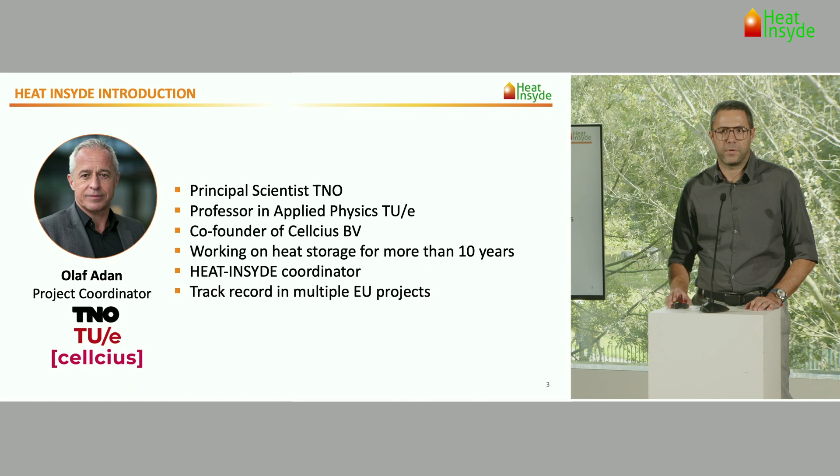My name is Francesco Pizzocolo. I'm the project manager of the HEAT-INSYDE project, and I'll be the moderator today. So just very quickly through our program: we'll start with an introduction about what the project is about, given by Olaf Adan, the project coordinator of HEAT-INSYDE. He works for TNO as a principal scientist and professor at the TUE, and recently co-founded, together with Pim Donkers, Cellcius, the company commercializing the heat battery.

Then the second set of presenters will go a bit into the technology. The two presenters are Professor Henk Huinink, our material expert and professor here at TUE, already a leader in several EU projects on the topic, and Pim Donkers, one of the founders of Cellcius, who will drive you into the hardware part of the battery.

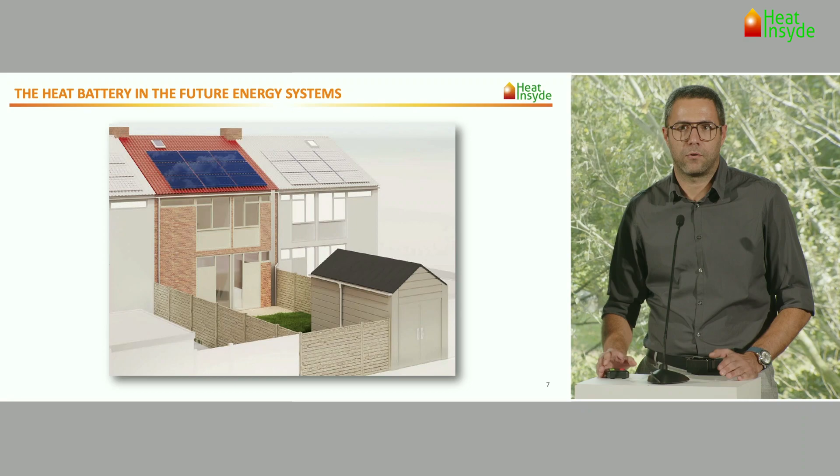The next presentation will be given by Bart Erich, about how the heat battery is going to be integrated into the future energy system. Bart is a senior scientist at TNO and also a lecturer at TUE, and recently started a company called Calosol, which he'll explain a bit more about later.

As with every big project, we need an external advisory board - basically a group of experts who check that what we do still makes sense, and not that we do it only because we love to do it. Two of these people are here talking to this audience today. One is Marc Linder, who is going to talk about other technologies for heat storage for balancing energy surplus and demand.

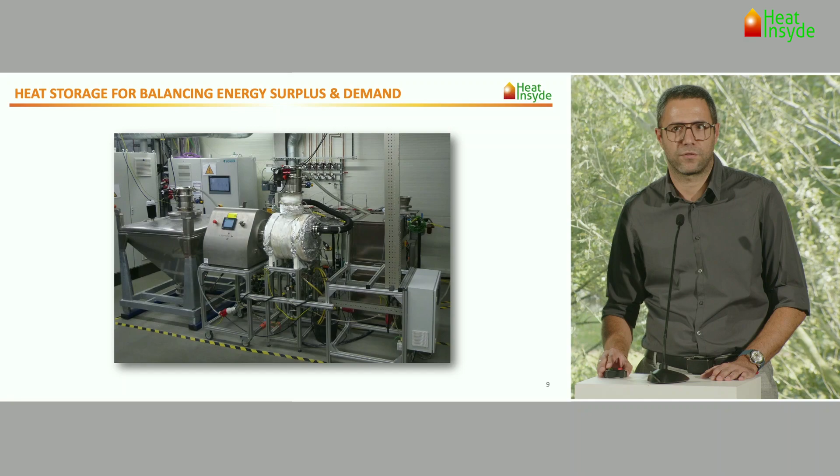Marc is a group leader at DLR, the German Aerospace Institute, and is a group leader in the thermochemical system. He has plenty of publications and patents on the topic, so he's a real expert and was really one of the guiding figures for us during the project.

And the last presenter is going to speak about the point of view of policy and the regulator - I'm going to talk about heat storage in the current political environment. That talk will be given by Nic Castellucci, who leads battery storage project development at TMEIC Europe, and has been working on energy storage topics for more than 10 years.

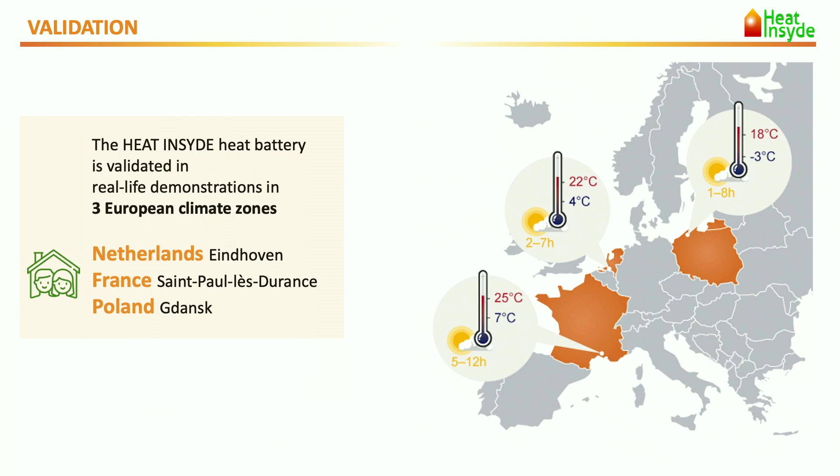As I said, HEAT-INSYDE is a so-called innovation action, meaning that it's not only about technology, but about bridging the gap between technology and the market, bringing technology into application. In order to do so, HEAT-INSYDE has 3 user-centric demonstrations where we validate the technology, spread over Europe in 3 different climatic zones: the Netherlands, France, and Poland. The first demonstration is really about to start now.

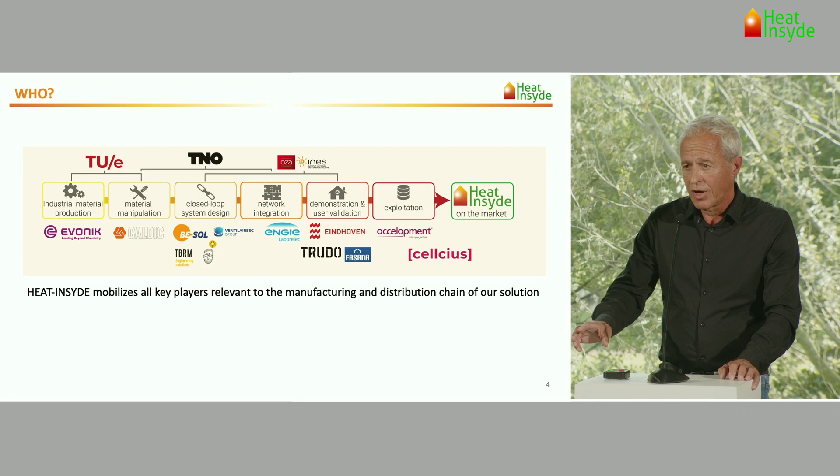So, who are we? I'm not going to introduce all the partners separately, but HEAT-INSYDE is mobilizing basically all the key players in the manufacturing chain as well as in the distribution chain. Talking about manufacturing, that's first of all about the material, but also about the hardware of the device, as well as about its implementation in the energy system. The consortium is supported by 3 technological players: TNO, Eindhoven University of Technology, and CEA from France.

This demonstrator was based on 2 main breakthroughs. First of all, if you would like to develop a rechargeable battery, you need a material that is also capable of being cyclic stable—you should be able to load and unload the material many times. That was the first breakthrough. The second breakthrough is a system concept that is able to use the full potential of that material.

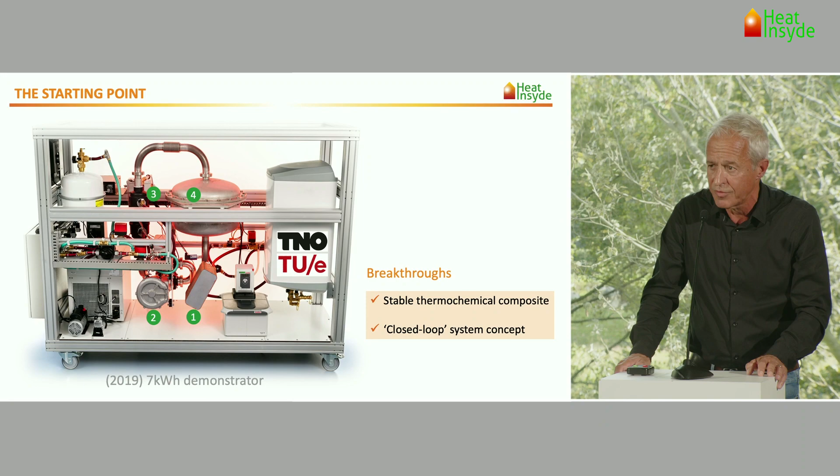Basically a system that is using also mature technology. If you talk about those components, 3 of the 4 are really mature components, thereby being cheap and also allowing us to make the steps towards the market very, very fast.

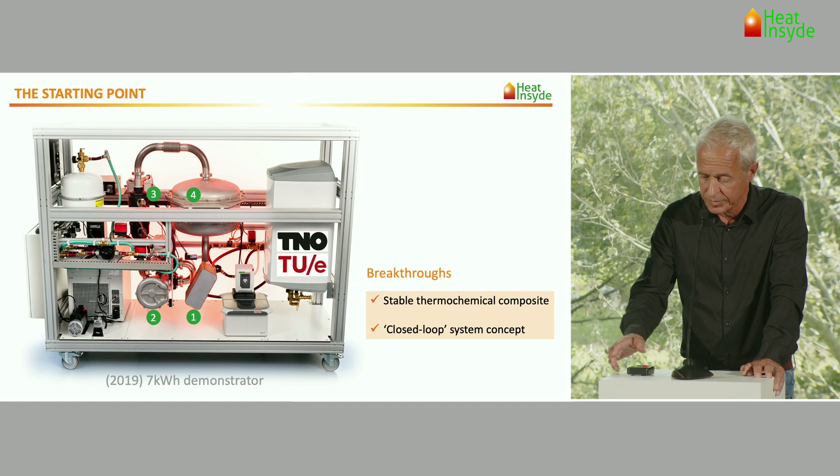Well, this first demonstrator also proved the unique selling points of the concept, starting with the fact that this is a storage device which is really loss-free. So once the energy is stored, it remains there without any loss.

Secondly, it's a very compact solution, meaning that if you talk about the energy density of the system, it's far more compact than water, which is the common way of storing heat in practice, and even more compact than the best lithium-ion battery that's on the market.

Thirdly, it's affordable. You can specify that in many ways, but it's far more cheaper than electric battery solutions—far more cheaper. Fourth, it's sustainable.

We are using material that is inherently safe. It's non-toxic, non-corrosive, non-flammable, and it's very easy to recycle. Apart from that, the eco footprint of the base material is excellent, and the system has been designed for fully reuse.

Fifth, it is a very versatile solution. So it is delivering heat—that's why we call it a heat battery—but it can be charged by either electricity or heat or both. And then there's one more thing, the sixth unique selling point: the cooling option. We're talking about heat, but basically cooling is also becoming very important, and the cooling option is inherently included in the concept.

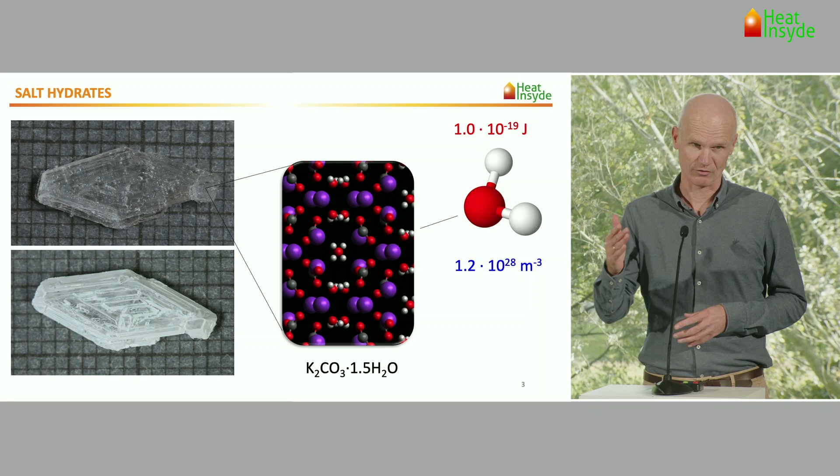How does it work, then, more practically? So you have salt—in this particular case we use potassium carbonate. You bring it in contact with water vapor, heat comes out because the water binds to the salt, and you can reverse that. Due to the fact that you can reverse that, it gives you an opportunity to store heat and also get it out again.

Going a bit more into what that could mean in terms of devices—Pim is going to say more about the device itself—but here you see the basic cycles. On the left you see the discharge cycle. So you have the dry salt, there is no water absorbed in that, that's the green part.

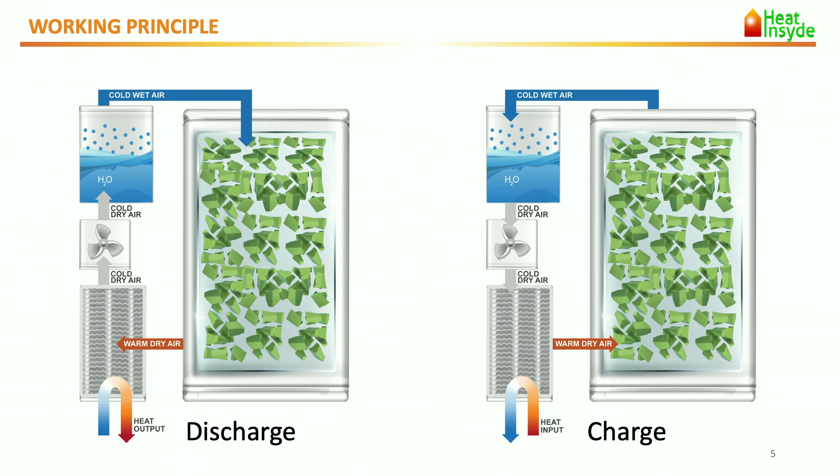Then, in the left down corner, you see a point where air is flowing up to a water vessel. There water evaporates. You bring that to the salt. The water becomes in contact with the salt, and then heat is delivered and given away in the upper down left corner towards the heat exchanger, and you extract it for use. And that's something you can, of course, reverse.

So now zoom in to the right graph. Again, going down to the heat exchanger, you bring in heat. With that you get warm air—you evaporate... sorry, let me correct that. You have warm air, you bring it down to the salt. There you drive out the water, and the water you condense in the condenser again. This is basically the charging cycle, because you charge it by drying.

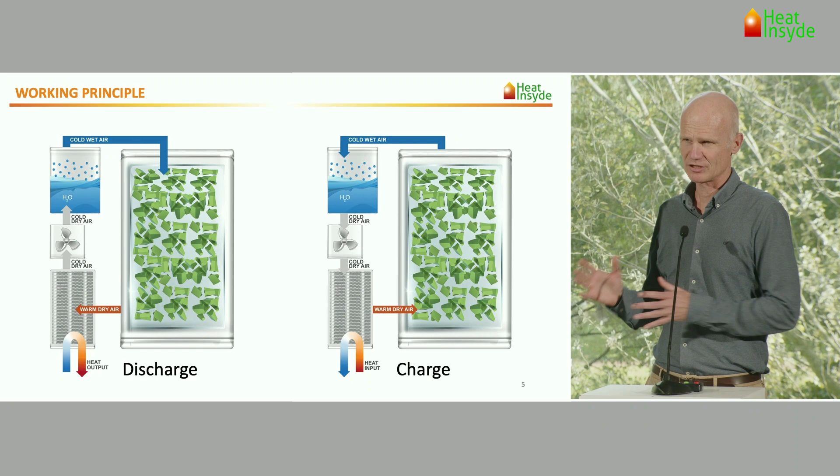A few words to make it a bit understandable what this means in terms of technology development. Water goes into a salt and is built in there on a molecular scale. That means, of course, bringing in space—you need space for the water molecule.

Now, if you start to think about developing materials, it's not only about having a powder and being able to throw that into a device. If you bring in a powder, I can already assure you, that doesn't work. So you really have to manufacture dedicated particles.

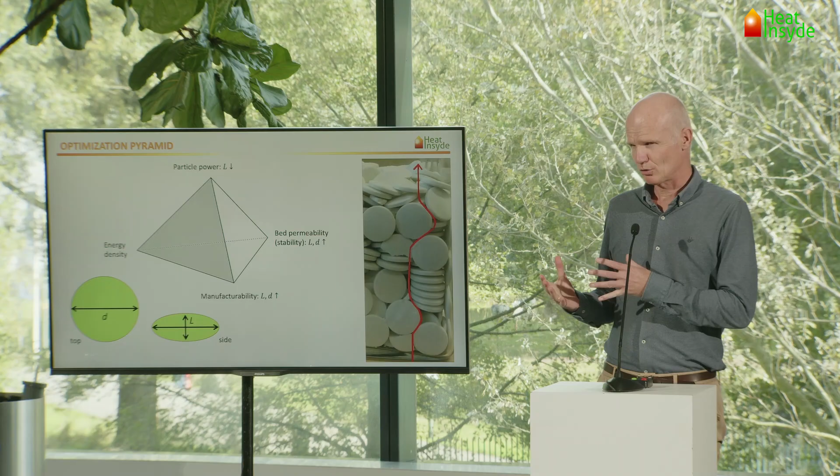There's a kind of optimization pyramid in that—you have different properties. Logical, technological properties: kinetics, there should be sufficient power output, so the material should respond fast. It should be stable, of course, but also manufacturable. Sometimes these different requirements are a bit contradictory with respect to the size of the particles. For speed and power you want small particles, but for manufacturing you want big particles, which are easier to manufacture. This is a bit the pyramid we've worked on for the last years.

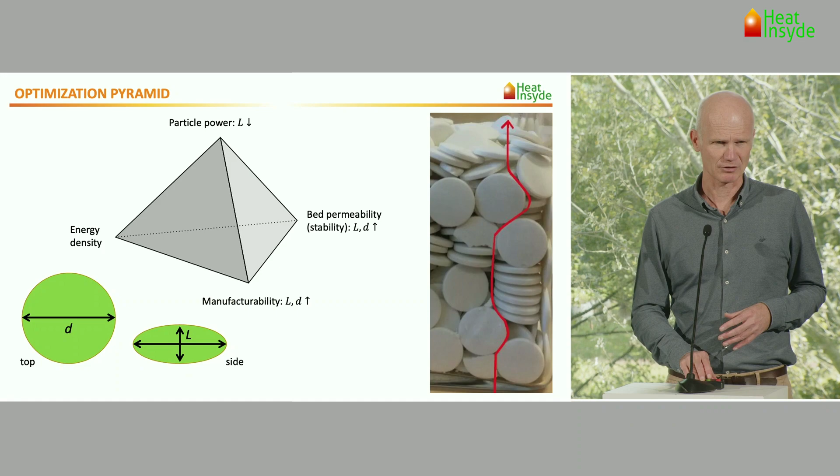A bit of a glimpse—this is how the most recent version of the particle looks like. You see key numbers with respect to the output characteristics: energy density, power output, and also estimated cost. Here I don't refer to the cost as how we made it, but based on predictions, for example from partners and colleagues who have experience with that, about what it could mean if you scale it up.

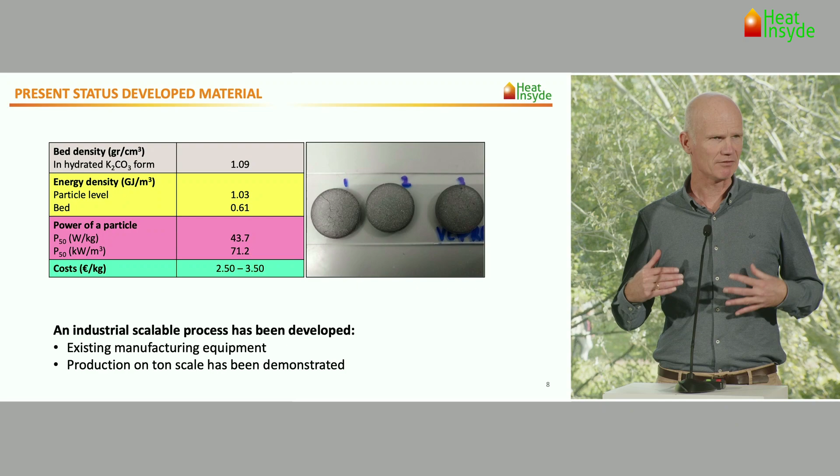With that, I want to hand over to Pim.

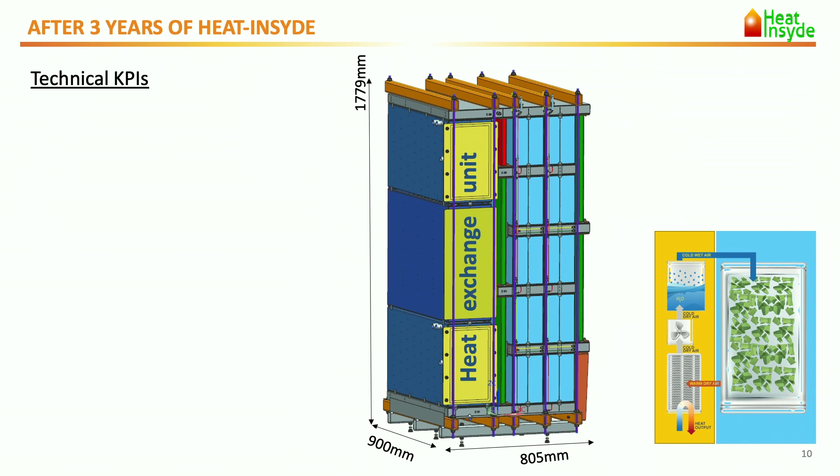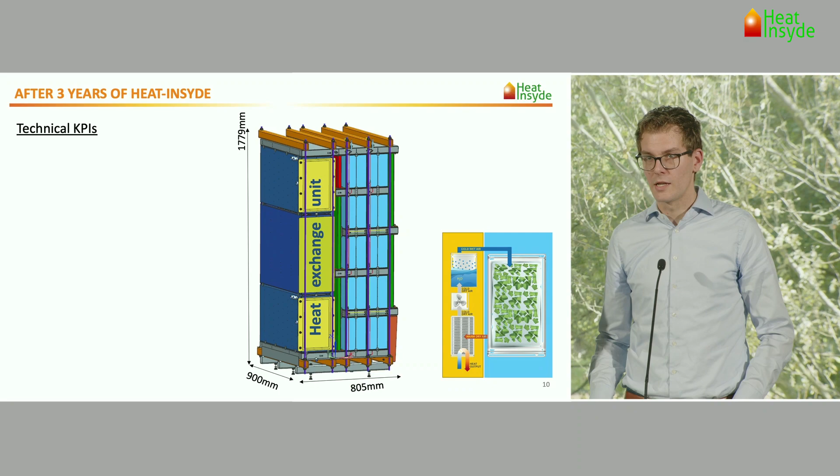Here you see the blue part with all the TCM vessels—that's where the active material is located. On the left side you see the yellow bars, the yellow part, and that's all the smart parts of the battery: heat exchangers, ventilator, evaporator, condenser—all integrated in the left part. And these two have to interact in the right way with each other.

Now, first of all, if you look at the KPIs of the device which we created, they were talking about capacity. Capacity is how much heat can you store in a battery with only one hydration-dehydration cycle. So it's not saying anything about how much heat you're getting out of the battery in total over a year or over 10 years—only one hydration-dehydration cycle.

We're talking about 200 megajoule. What you see here is 10 boxes, and we can change the capacity quite easily. We have 2 rows of 5 boxes, and we can enlarge that or make it smaller.

The other thing is charging power. We're charging here, and we can do that with solar collectors, with PV, or with just grid electricity. So any energy we can put in ends up, for our system, in the power of the order of 500 to 4,000 watt.

Discharging power is a little bit lower, meaning we can discharge a battery between 500 and 2,000 watt. It's important to know that at this moment we are not foreseeing the battery as a standalone version, but always in cooperation with a heat pump and a buffer vessel. This means that the high powers you need for taking a shower will not come directly from the battery, but we use that in combination with short-term storage.

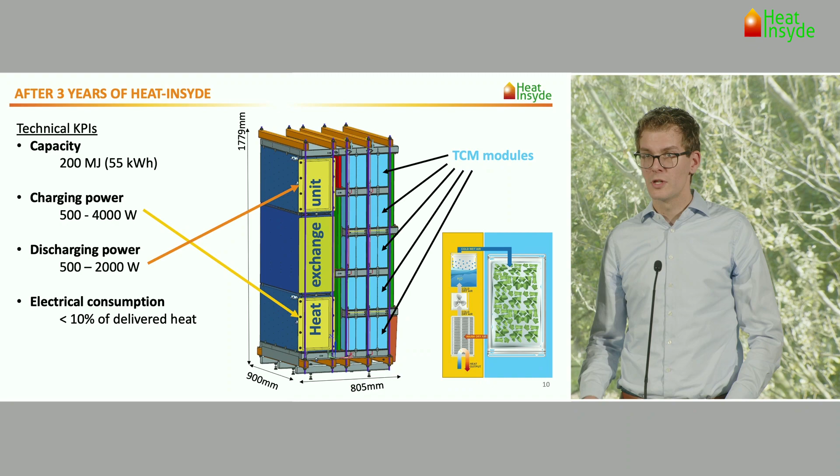Last but not least, as I said, we are integrated in an entire system. Bart will explain more about that. Because of that, we are going to increase or decrease the electricity consumption of the entire house. But in this battery, of course, we also need some electricity, not to charge it, but really to keep it running.

You have ventilators in our system which bring the humid airstream to the TCM. To keep that at a decent level, we designed our battery so that our electricity consumption is always less than 10% of the heat output. So talking in terms of COP, we have a COP of 10 or higher.

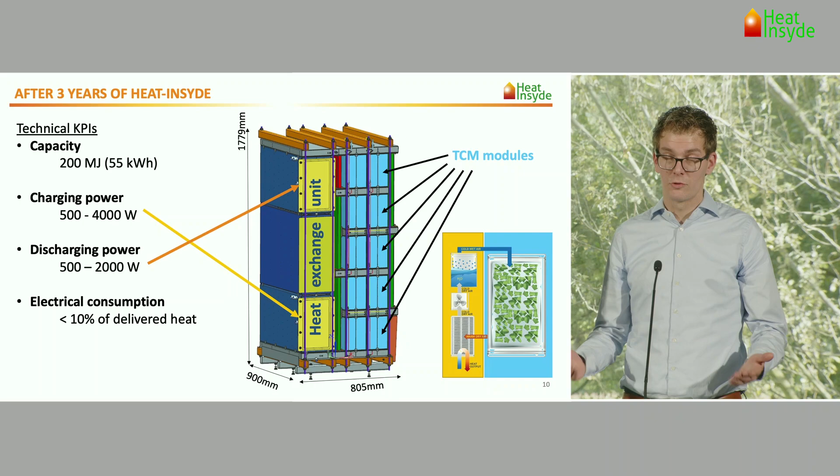Now, how does a battery look like? I showed you the picture, and you will see in a few hours how the battery really looks like, but this is how we build it up. It contains small parts which you can build in at every house, every location, as long as you have floor space left in the order of 1 by 1 meter. We can bring it in with small packages and build it up. Building up such a battery takes about 1 hour.

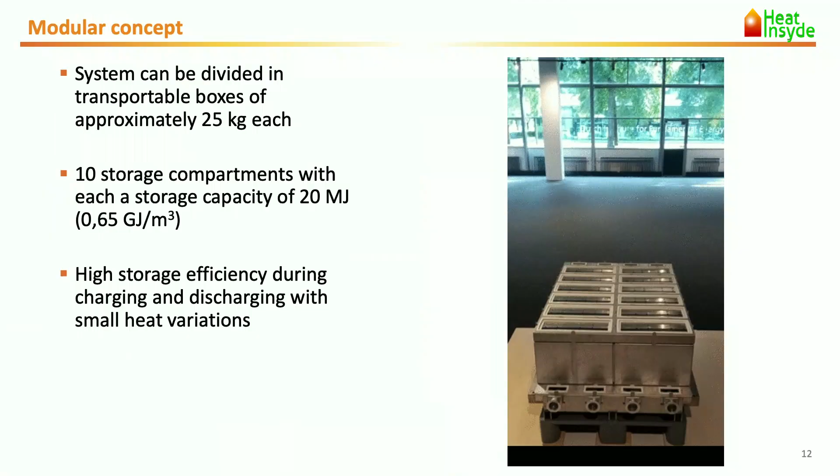Then there are 3 KPIs I'd like to show in more detail. One is the modular concept, which I already explained. We have a certain amount of boxes, 60 boxes in total in the first version, which we could build up, and now we have already a smaller one. So the modularity of the system is really high.

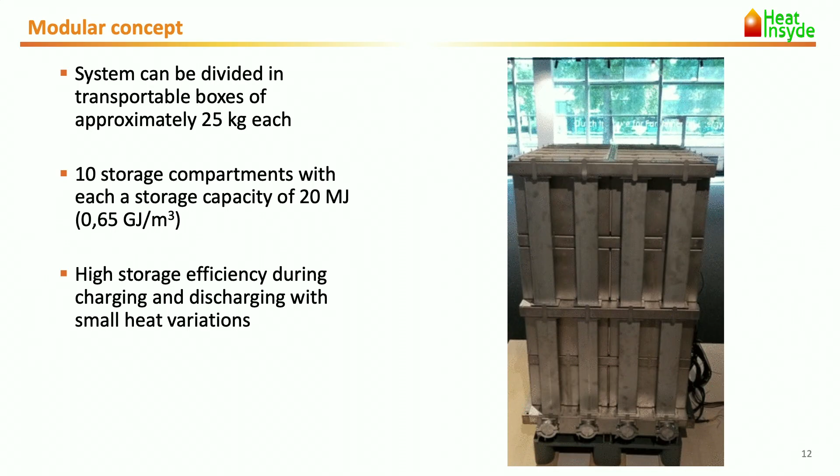Each box contains 25 kilograms of active material, which means you can lift it by one person. Why do we have such a small box?

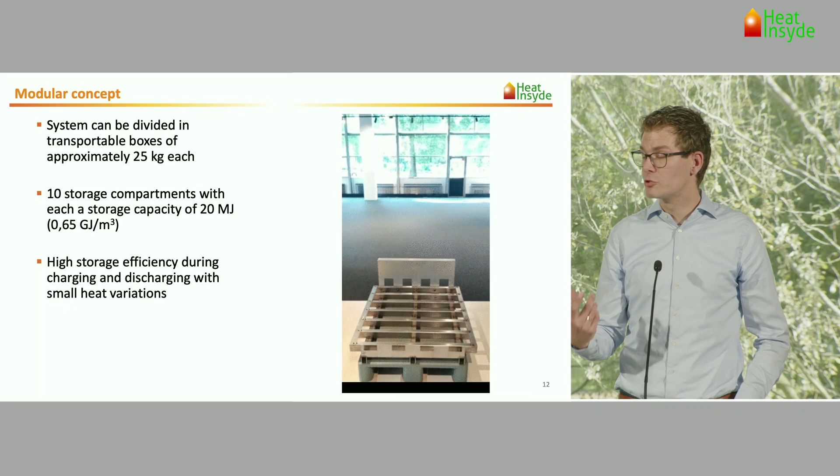It's because we'd like to be able to charge and discharge the battery with small amounts of heat. If you have a large vessel, just one large vessel of 1 cubic meter, you have to heat up the entire vessel before you're able to do the chemical charging of the battery. Heating it up isn't an issue, but then you'd not only cover the heat capacity of the battery; you'd also need to cover the chemical reaction, really removing the water from the salt. For that, using smaller boxes makes it easier to have a quick charging and discharging cycle.

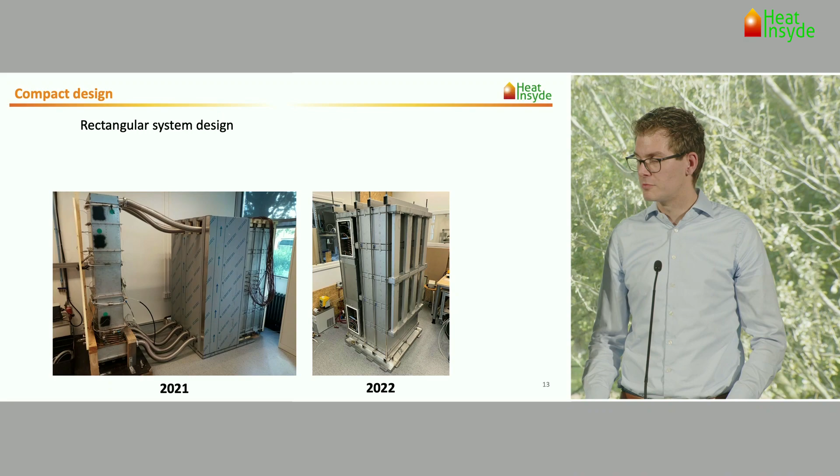The other thing is our design. We changed our design compared with previous projects from a circular design to a rectangular design. Olaf already showed the old version, a really large battery. In 2021 we also had a large battery, but the dimensions were already different, and we saw the component box and the battery next to each other, but they were not integrated. Now the 2022 version is a really integrated battery, combining active material and component box. That's the step we made forward.

Due to the design changes, going from a circular one to a rectangular one, we are increasing our storage capacity on a certain surface area. The other thing is that we are making a fully integrated battery, which also decreases the amount of floor surface occupation.

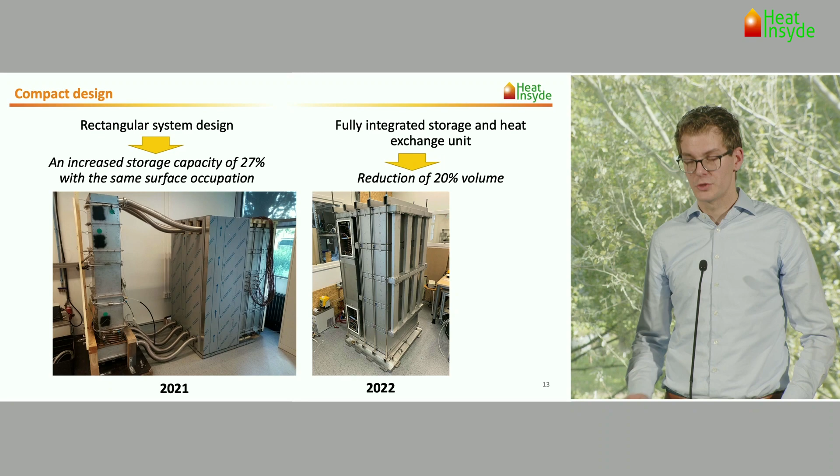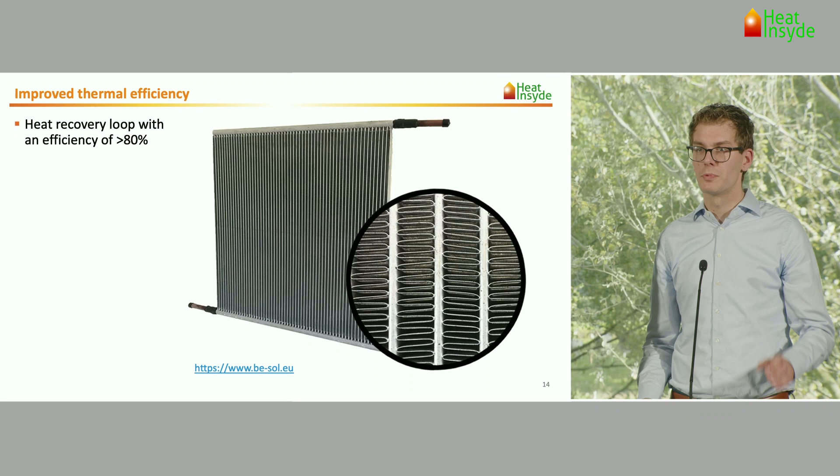And then, last but not least, is the heat exchangers which we're using. One of the key things is that we are going to get heat out of our battery, but we also need to evaporate water. We're doing this evaporation process at a really low temperature. If we would like to get 60 degrees out of the battery, we are evaporating in the order of 10 to 20 degrees Celsius, meaning that we have to decouple the process of what is happening in the TCM and what's happening in the component box. And that's what we're doing with help of a heat recovery unit.

And the impact of this heat exchanger is really high. Currently we have a performance in the order of 80%, meaning that, where we came with an efficiency of 60%, we improved the heat recovery efficiency by almost 20%, and that directly impacts the size of your battery. So having a better heat recovery unit will increase the performance and decrease the volume occupation of your battery. And that's one of the major achievements which we did within HEAT-INSYDE.

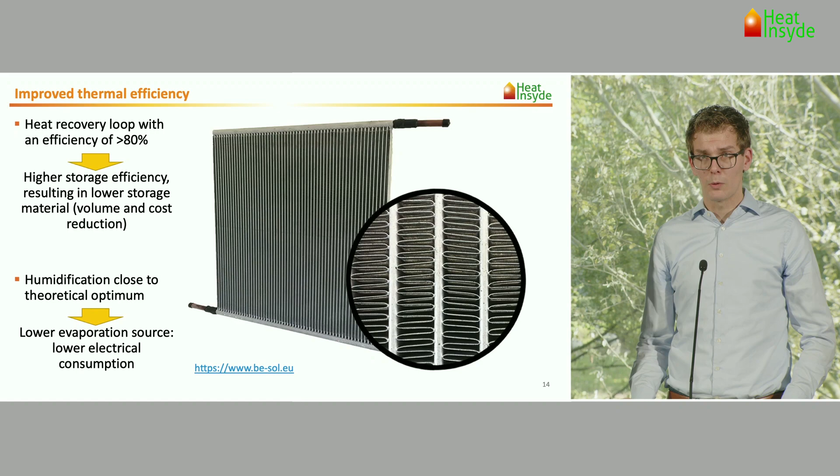And with that, I would like to finish. And what you see here is the transition to Bart, his work. Thank you.

Thank you, Pim and Henk. I have to say that I know the story for more than 3 years now, but it's still very cool to see where we started and where we are now. And as Pim mentioned, this is a perfect transition towards Bart.

So Bart is involved in several technologies, and is going to give you a hint about how all these technologies are integrated. Thank you very much. And because everybody's so fast, I have more time or not?

So what I would like to talk about is how we are going to integrate the heat battery into a house. We have 4 different demonstration sites. With the help of our partners, we are going to demonstrate in 3 climate zones. And what I would like to talk to you about is why do we need the battery for heating a house and cooling a house? How can a thermal battery help, and what do we expect of the demonstrations we are going to do in Poland, France, and in Eindhoven?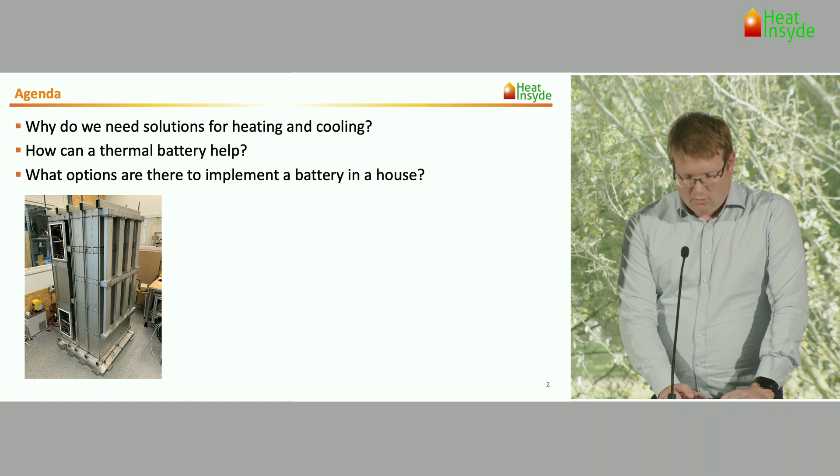And what's important is also to see what are the different options to implement such a battery in a house. Well, if you look at the current houses, then we know that 60% or even more of the energy demand is not for electricity, but for heating and cooling. And what we also see is that the roofs are going to continuously expand the amount of PV we put on the roof, and it's almost completely full with solar PV.

And if we want to renovate houses, then we see also that nowadays we have a problem with the grid connections. So many of the social housing corporations have to ask for enlargement of the grid connection if you move away from gas, and they're simply not easy to enlarge. Waiting times can go up to several years. So what we need to do is find solutions where we do not have to enhance these grid connections.

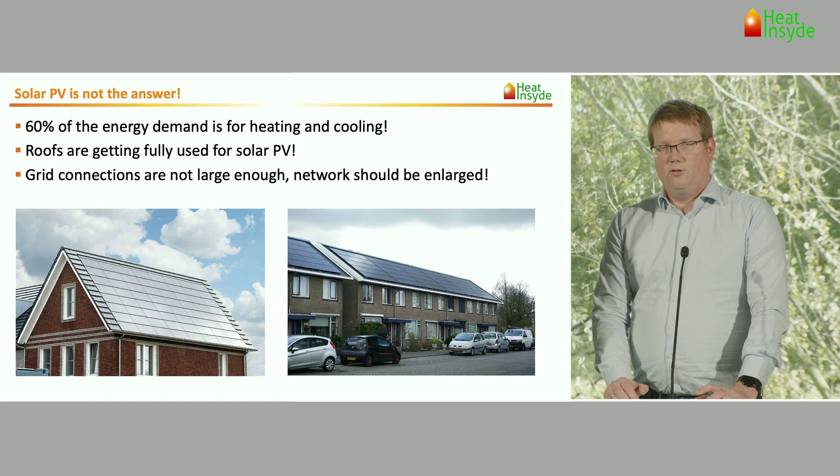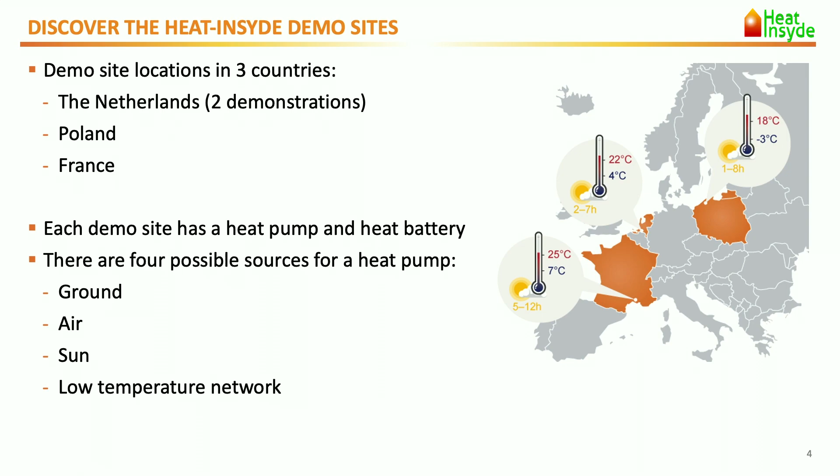So what we are going to do is actually demonstrate how this heat battery will work in these demonstration sites. With the help of our partners in France, it's CCA and Ventilair-Sec. In Poland, it's Prefasada who helps us. And then in Eindhoven, with the help of Trudo, we have found one of the houses where we are actually going to install the heat battery in a shed. I will explain later why we do that in a shed.

And also we are going to install, with a house owner here in Eindhoven, with the help of the municipality of Eindhoven, we found one tenant where we are going to install the heat battery in their house, having a low temperature heating network connection to that house.

Each demo site will have a heat pump and the heat battery. And in principle, if you are installing a heat pump, there are 4 typical sources which you can use as a source for this heat pump. First of all, you can use a ground loop as a source, but also air. Of course, one option is also to use sun, regularly known for PVT, so where you have PV panels on the roof with thermal connections on the back. But we also have a new option, which I will show you. And you can also connect to a low temperature network. Actually, 3 out of these 4 we are going to test in this demonstration site.

So I made a short summary. In the Netherlands, here in Eindhoven, we will connect to a low temperature grid. The house of Trudo will be connected to solar panels where we harvest energy from sun and air. In Gdynia, Poland, we will connect it to a heat pump connected with an air unit outside. And in Cadenet, France, we also connect the system to an air source.

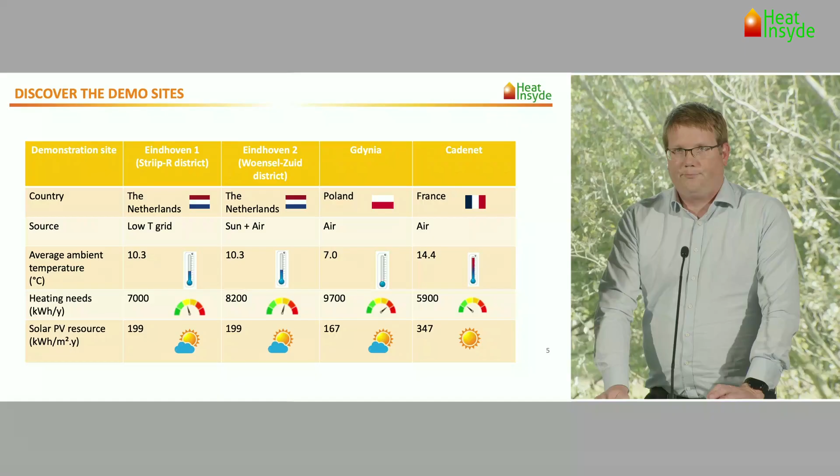If we are going to install this in a house, we know that a lot of houses here in Eindhoven, row dwellings, do not have that much space. And if we install a heat battery, a heat pump and buffer vessels, the already small living space gets smaller. That's what we don't want for the tenants.

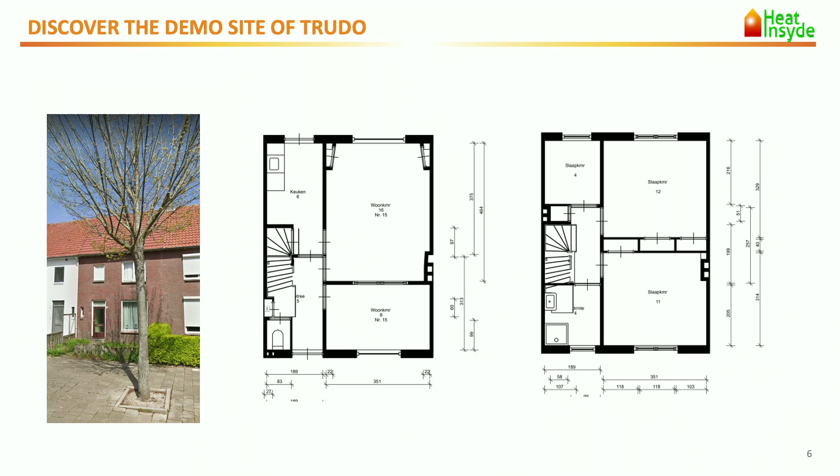The second thing is that we have to move into the house of the tenant and make space and clear up room to actually install this system. So that's why we said, why not go to another solution which was developed in a recent EU project and was demonstrated also here in Eindhoven.

We installed a smart heat shed in a house of Trudo. The advantage of such a heat shed is that we can place it in the garden, connect it to the house, and you have a completely gas-free heating solution. What's also an advantage with this system is that you can prefabricate everything. Still, you need a source.

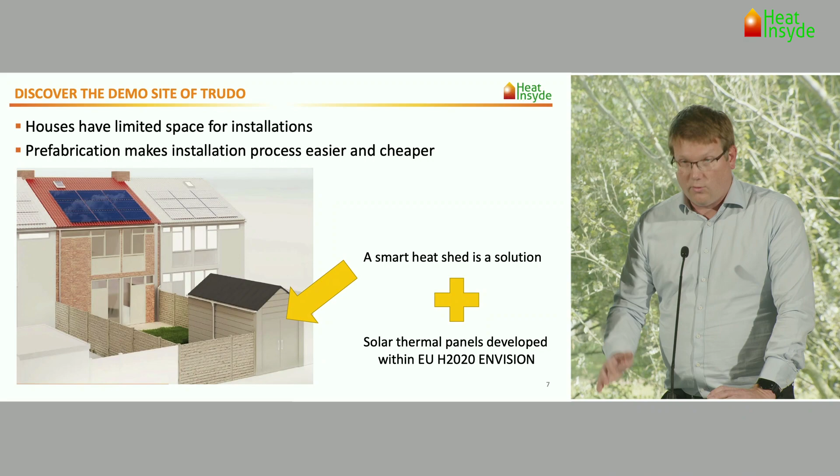So what we did in the European project is develop several heat harvesting thermal panels, which you can connect to the heat pump as a source. I want to jump into that a bit further before we go back to the installation of the heat battery in this shed, which we will visit later. We have developed a novel full renovation concept that harvests thermal and electrical energy from the full building facade, from roofs as well as windows.

60% of the energy demand of a house is needed for heating and cooling. So to harvest that energy, we need more surface area of the facade. An energy positive building is a building which harvests more energy than it uses.

We use the invisible part of the light we have from the sun, and because of that, we can use all kinds of colors, not only the black which we are used to with PV panels, but also green, red, blue or gray.

I'm a tenant from Social Housing Corporation Trudo, and I'm happy as my house is energy positive, free from gas, with a net zero energy bill, and who doesn't want that?

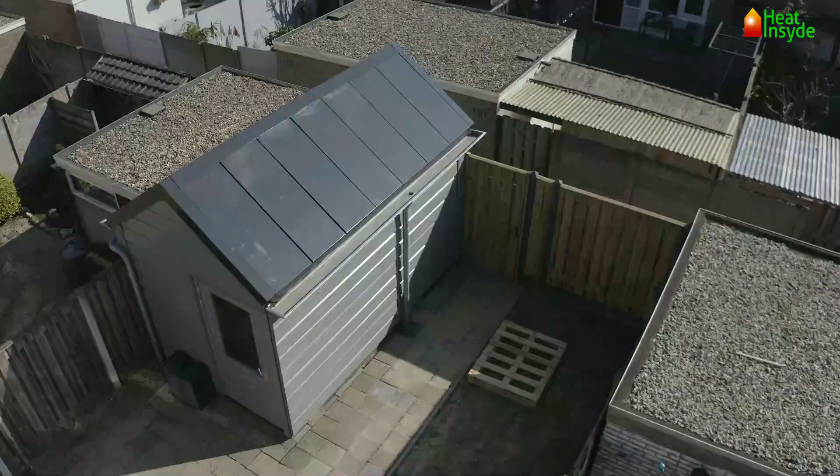We not only made this facade, we made several facades, on the north and on the south. But what made it special is that we also made a little shed with it, and it's only the shed who produces the energy. We want to implement these kinds of technologies for every house all over Europe.

The Envision project has created energy-positive buildings, and with that we can fulfill the 2030 energy ambition of the EU and reduce greenhouse gas emissions.

We were one of the finalists in last week's European Sustainable Energy Week, and I'm quite sure that we should also submit our project of HEAT-INSYDE to this for next year or the years after.

So the panels which we harvest are based on the fact that we as humans don't see all the light. Actually, only 45% of the sun is what we actually see. Also, the near-infrared or UV light can be used to harvest energy.

So these panels actually work as a source for the heat pump and then drive the tap water production and heating. What you just saw was a demonstration site.

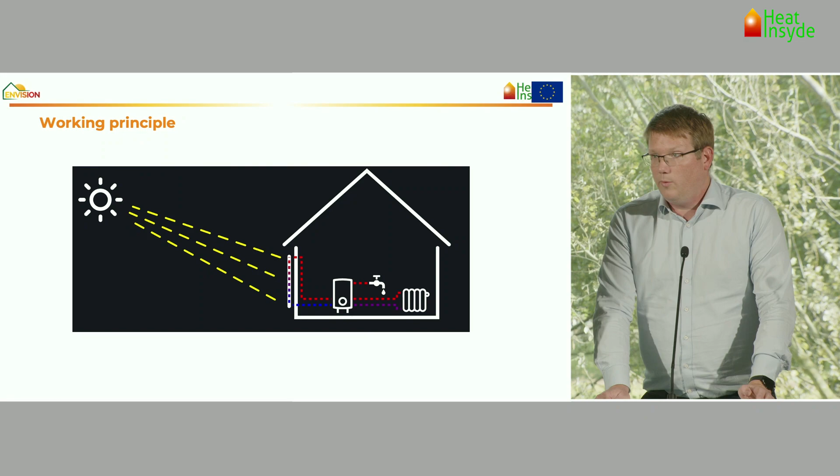We did 3 houses in Helmond for Compaan, Social Housing Corporation Compaan in Helmond, and 3 here in Eindhoven from Trudo. This is actually the shed, as we want to install them now with a heat battery into the houses, into our one house of Trudo. So this is version 2 of the heat shed, now produced by Emergo, a partner of the Envision project.

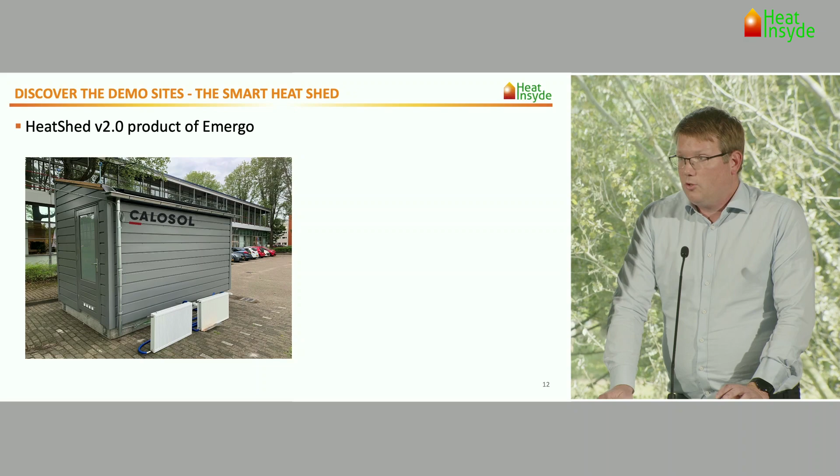So we will see this, and these panels which you're looking at are the source for the heat pump, and it's then connected to the heat battery.

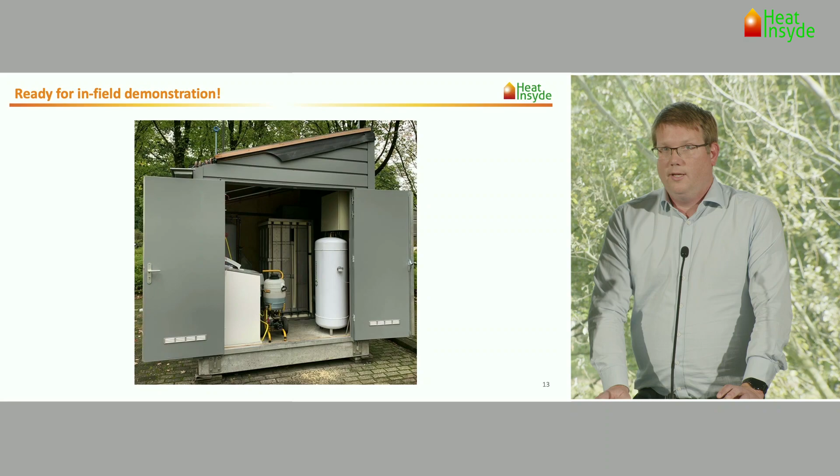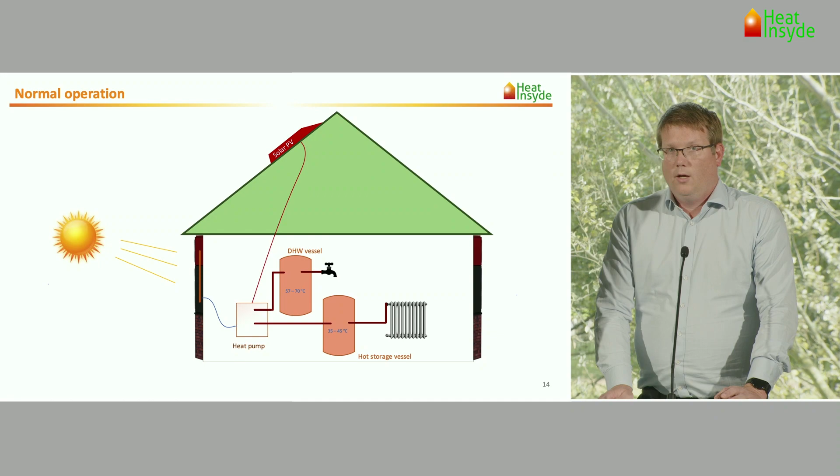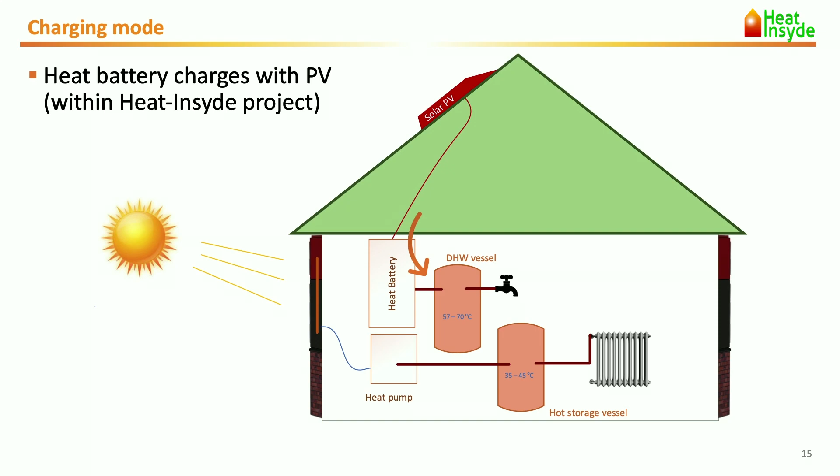We want to heat up the buffer vessels temporarily, so you need hot water of at least 65 degrees now and then. For the heat pump, this is very inefficient to do, with a very low COP. So what we do is charge the heat battery during a day with a lot of sun, when we cannot put it back on the grid. We use it to charge the heat battery, so the salt gets dehydrated. At the same time, we also charge the tap water buffer. So we use electricity to charge the battery and also create the tap water—especially good when electricity prices become negative, which happens regularly throughout the summer.

In the future, it might also be possible, in the development of the battery, to also use a heat pump to charge it. And what we do in times when we actually need the energy—let's go to the next slide—is the opposite.

We use the heat battery to create the tap water. The numbers may be small on screen, but the top tap water vessel is about 70 degrees, whereas the CV heating vessel is about 45 degrees. So with the heat battery, we create the tap water vessel so that the heat pump can produce thermal energy for the heating buffer vessel at a very high COP.

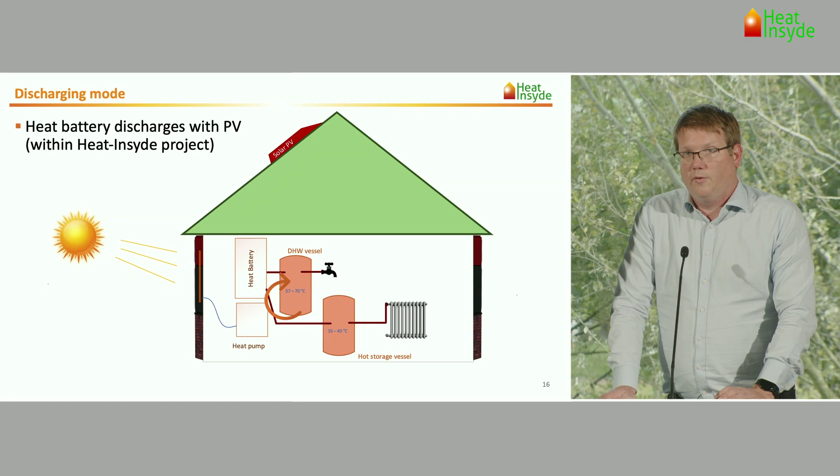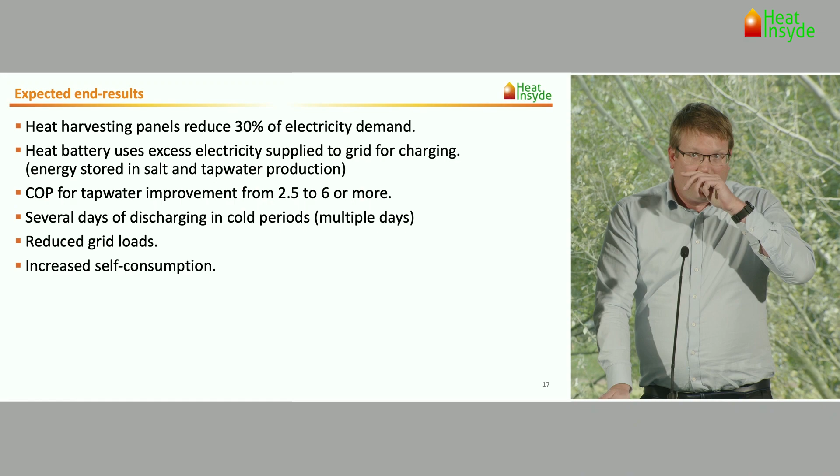So what are the expected end results? We already know that comparing the heat harvesting panels to a regular air heat pump system gives a reduced electricity demand of 30%. That's one. The heat battery will use excess electricity when prices become negative to supply energy and charge the battery. And we expect the COP of tap water production to improve from 2.5 to 6 or even more.

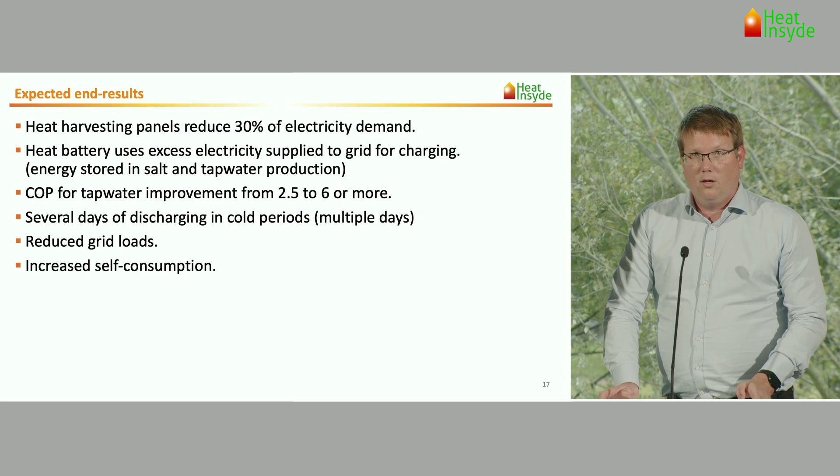And if there's a cold week, we can use the heat battery to discharge over several days in these cold periods to create tap water. This helps reduce grid loads during very cold periods, and also increases self-consumption—the amount of energy you produce yourself that you actually use yourself. Of course, this battery can also be used to create water not only for tap water, but also for space heating, and that's what will happen at one of the demo sites.

That was my explanation of how the heat battery helps in the energy system to create tap water with reduced energy. I'd also like to thank Van der Hof installers for helping us install the heat battery, and I think it would be very nice to visit it later on. Thank you.

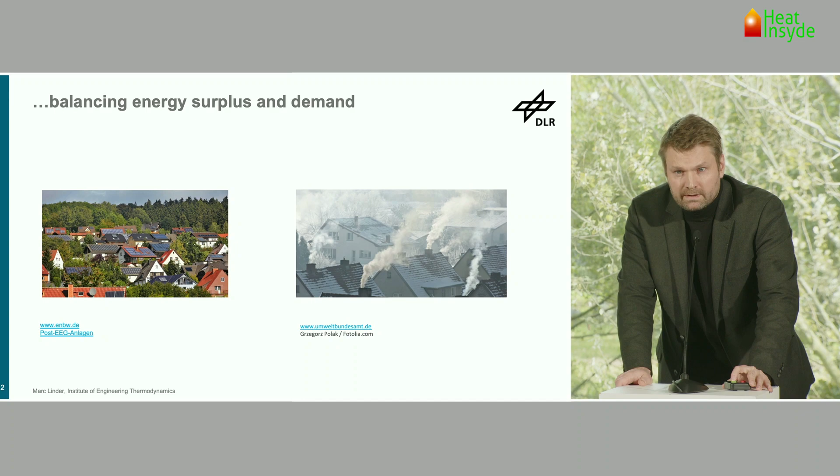I think it's clear what this means for a thermal energy store. We have a thermal equilibrium—everything hotter than ambient tends toward ambient temperature, right? Since the duration of storage from summer to winter is extremely long, we need solutions other than sensible storage. One is shown here in this video: everything is at room temperature in the laboratory now, roughly 20 degrees Celsius.

When my colleague is actually opening the valve, what is happening in principle is that on the left side, there's an exothermal reaction going on. The colors tend to red, showing that the temperature increases, whereas on the right, the endothermal reaction goes on, and colors tend to blue.

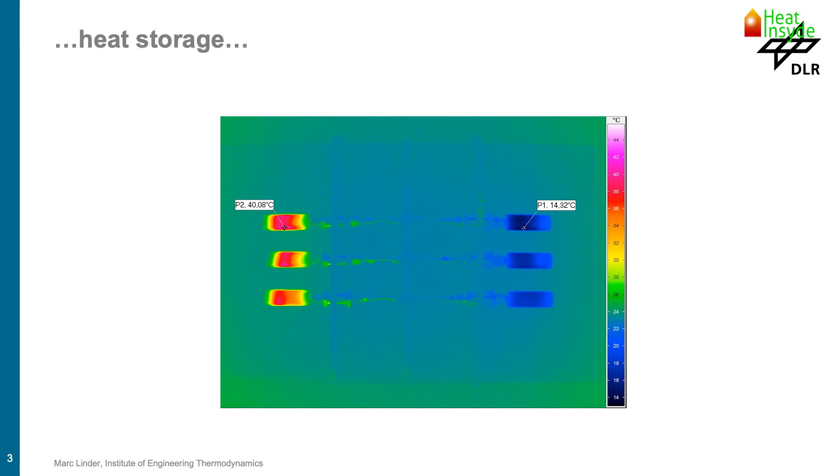The interesting thing is that we do not store thermal energy, we store a chemical potential. I'll come to this point later on. We have been discussing in one of our meetings in the HEAT-INSYDE project what type of energy we should use.

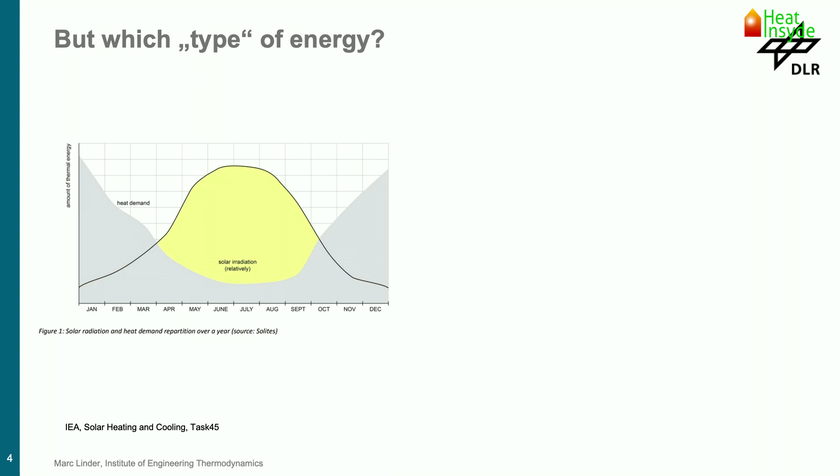Should it be thermal energy storage for charging or electric energy for charging? Now this is a diagram which is basically nothing else than a diagram of the two pictures before. In the grayish part you see the demand of energy, and in the yellow part you see the availability of solar irradiation. We can have thermal collectors with a high efficiency in order to generate thermal energy, put it into our storage, and release it on demand.

This changes a bit if we go to electricity. This is now data from the German grid last year, 2021, all over Germany, and you see that the yellow part is somehow comparable. It's lower, of course, this could be due to efficiencies, but in principle it's comparable. But the main thing which changes is that we can easily transport electricity from our neighbors to our building, or even from the next village to our village, or even further.

This is a fundamental difference to thermal energy, and this is why we could include also wind energy here in blue. You see that they are a bit complementary, I would say. If you compare it, at least for the data from 2021 in Germany, you see that the heat demand is somehow comparable to the availability of wind electricity.

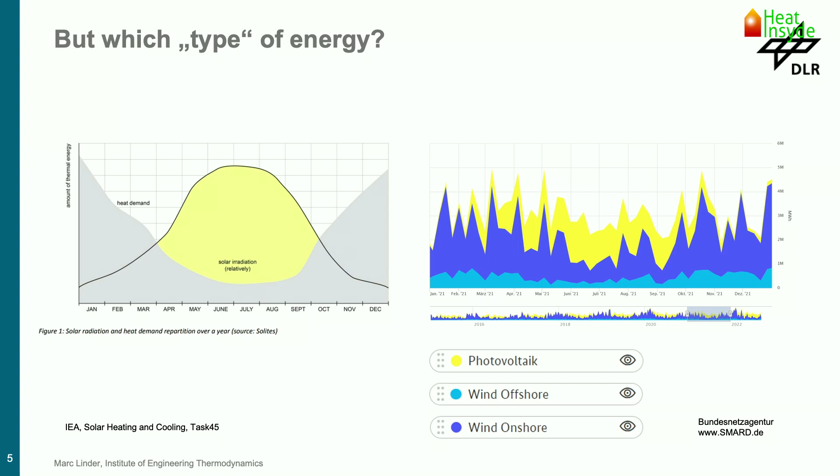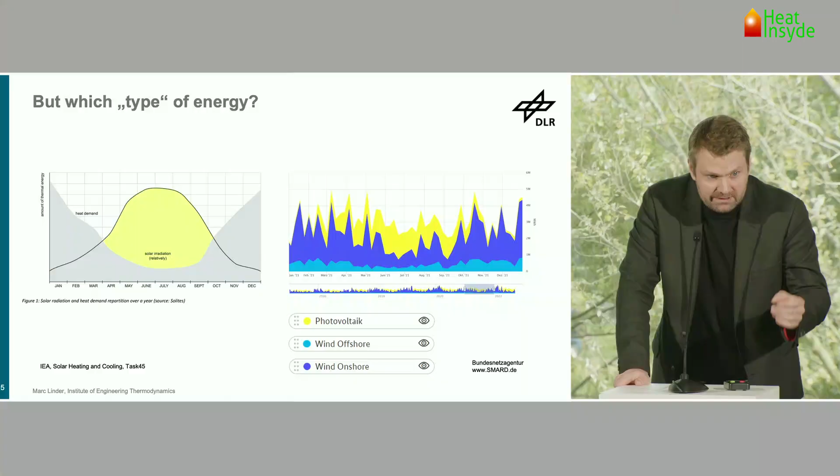What changes now is that we do not only talk about one cycle a year, charging in summer and discharging in winter. We can say, okay, we talk about having a bankable energy storage for the peaks or the low parts of electricity production. This is now over weeks or probably months. Of course, they are hardly predictable, so the storage has to be bankable.

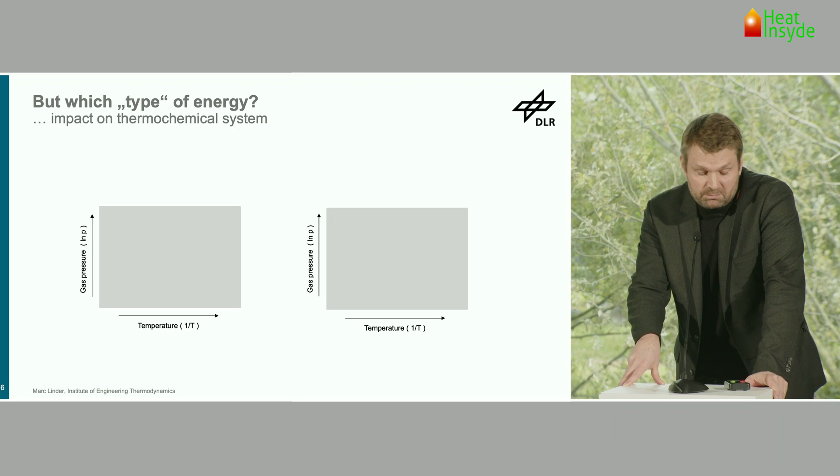What does this mean for our thermochemical system? Now there's a bit more technical detail, equilibrium diagrams here, Van 't Hoff plots. You see on the left an orange line, which is low temperature charging, thermal charging. In the upper part, we add thermal energy, we release a gas - we heard this just before the coffee break - and the blue part is actually that we either release it to the ambient or we condense it in a closed system against ambient temperature.

The lower part is now the discharging. This is something we have to do in winter. You see temperatures are lower, pressure is lower, so we need to evaporate water there in order to generate thermal energy again on the left. This is how the video actually looks: if it's working, you see on the left it's red, on the right it's blue.

Now, if we talk about electric charging, we can change it. We can say, okay, yes, we go to higher temperatures, because electricity we can easily transform into high temperature thermal energy. Now the red one is there, charging again at higher temperatures, releasing our gas, condensing it. At the blue line, everything is identical, except a second arrow is missing.

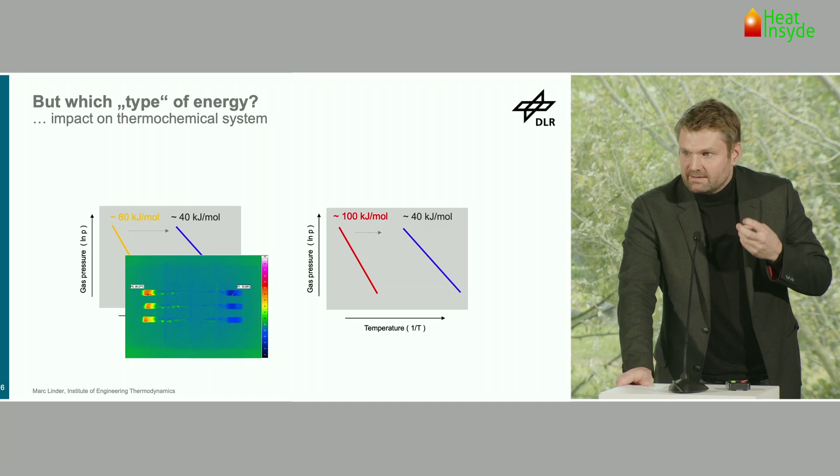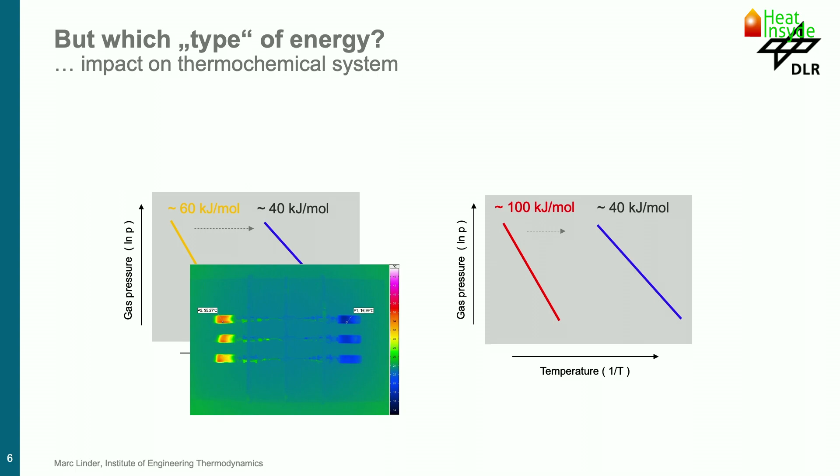Why is that? If you now compare the enthalpies, given as numbers above the diagrams, you see that on the left side the operation is rather a heat pump. We absorb thermal energy at low temperatures, 40 kilojoules per mole, use our chemical potential, and generate 60 kilojoules per mole at a temperature which is technically interesting for us. On the right side, the difference between these two enthalpies is again 60 kilojoules. So we can say the left side is a heat pump with a storage option, and the right side is only a thermal energy store - we just add our two reactants.

What is this type of material? It's so-called quicklime, and we use it at DLR in order to investigate whether we can use it for long-term energy storage. The reason is probably obvious: it's a natural material, it's almost abundantly available.

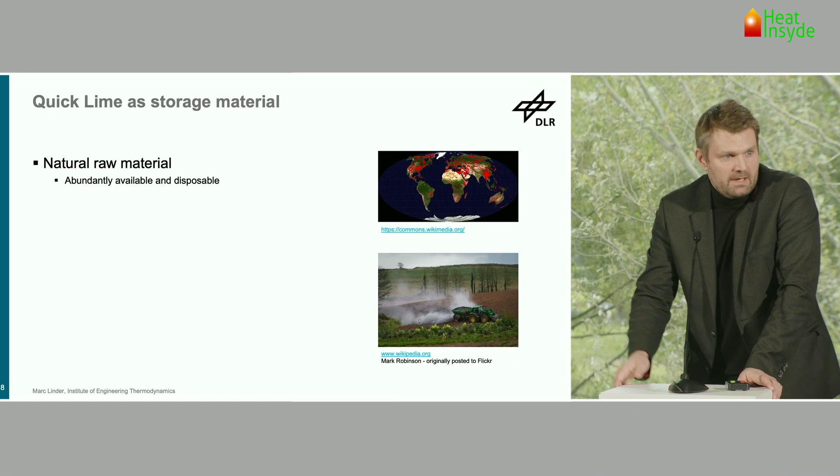In red, you see karst regions on Earth, so basically all over the world we could get the material from nature. And on the bottom, you see that if we treat it carefully, we can also dispose it back to nature. This is actually where people try to adjust the pH value. We have the chemical reaction with water. This is also nice, there is no chemical degradation there. It's also nice that we already produce it at industrial scale, so we have it available in megatons already.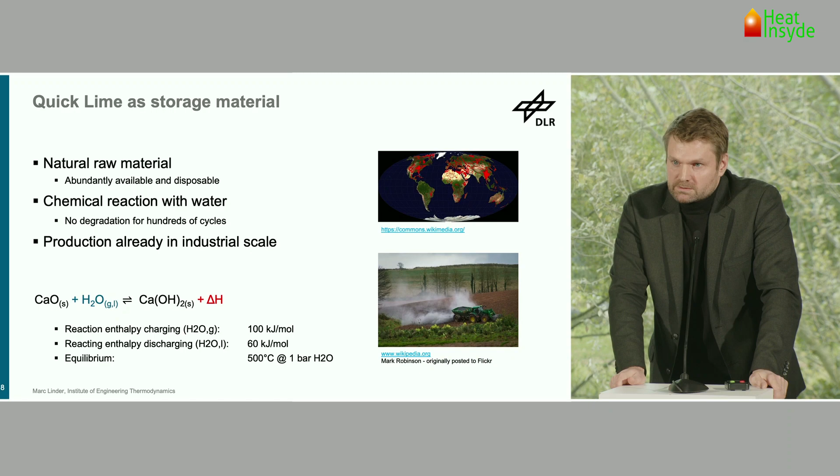So what is the issue? What is the problem actually with this approach? I do not want to focus on the chemical reaction here, but it's clear that if we have calcium hydroxide, we cannot squeeze liquid water out of it. We have to add reaction enthalpy, and what we release is water vapor. What you saw on the video is adding liquid water, so in principle, very generically, we are already missing 40% of the energy.

And the second thing is that it's a high-temperature thermochemical reaction. You see the equilibrium is around 500 degrees Celsius, so we need to heat up everything to 500 degrees Celsius in order to drive the chemical reaction. So we shift our problem, let's say, from availability of water vapor in winter to a kind of process integration or system integration, of what to do with this thermal energy.

So what about the energy balance? Think of using electricity. We have two arrows here: the red one is the sensible heating of our solid, the green one is the supply of our reaction enthalpy, the thing actually that we want to store. And this dissociates the compound, so we have two arrows again, the blue one and the grey one.

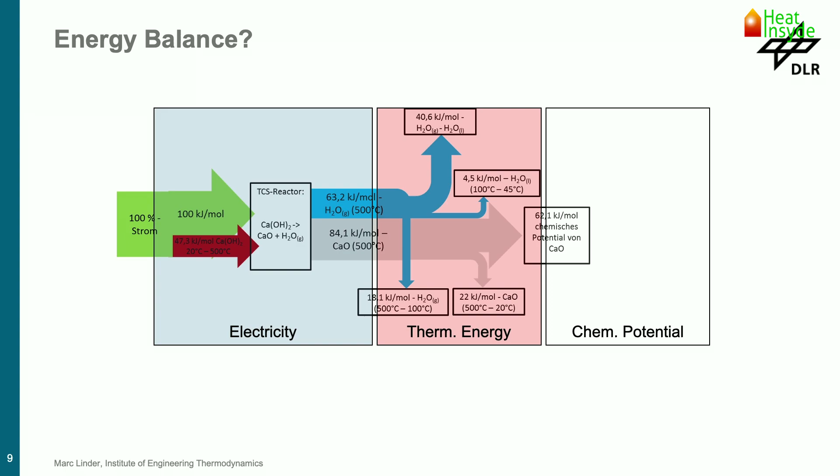The blue one is the water, and the grayish one is the solid. Both contain non-storable or hardly storable energies, thermal energies in the form of sensible heat and latent heat of condensation of water vapor. The rest is actually what we wanted to have: our chemical potential, the solid you saw in the video. So if we neglect any energy efficiencies and any technical system, we can simply state that roughly 40% of the electricity we spend to charge our system is still available as chemical potential, as the solid in the video after adding water. The rest, 60%, is kind of thermal energy we should use for daily consumption.

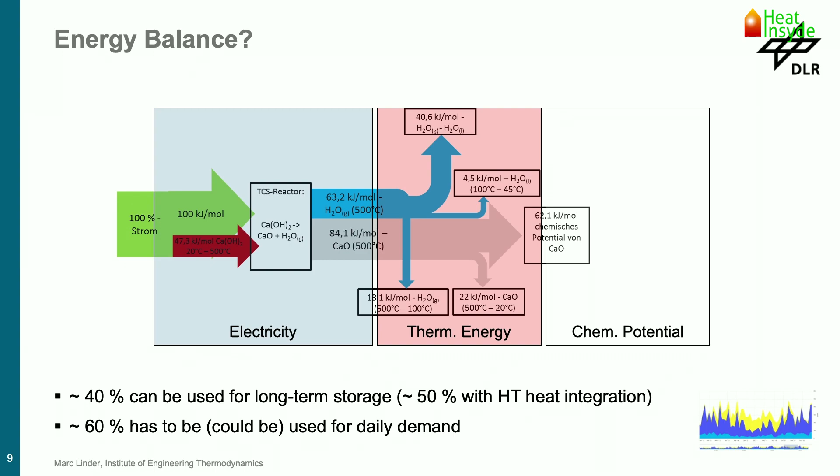Now let me remind you of this picture at bottom right, this changes. If we talk about electric charging, this means we can also charge in October, December, and March with electricity, and there is of course thermal energy demand there. So we can think of an integration of these unstorable or hard-to-store parts of this chemical reaction.

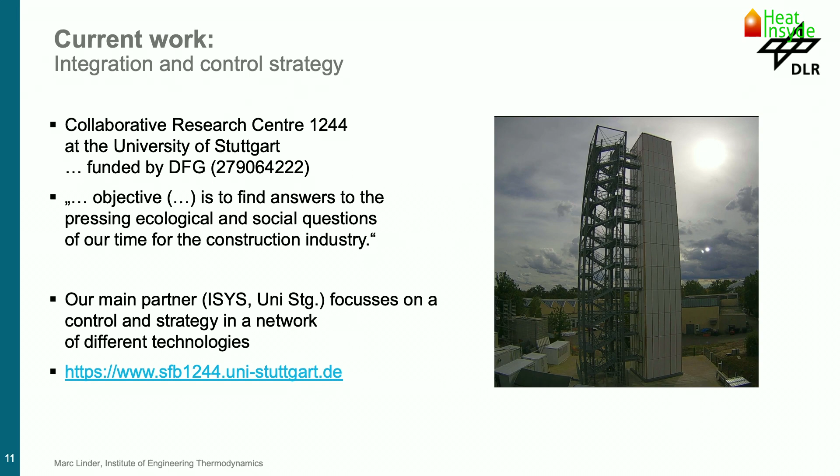And in terms of integration, we are part of a large collaborative research project in Germany, DFG, probably you know that. They fund universities for fundamental research, and this large project at the University of Stuttgart built that high-rise building, small high-rise building you see in the picture. This has been there for one year now, and the idea is that people can test different technologies there and see how they actually behave outside of the laboratory.

For us, the most important partner, as I mentioned before, is a partner who knows a lot about control technology and control strategies, because we have to understand when we need thermal energy and when electric energy is available, in order to operate our system in such a way that it can reach a decent efficiency all over the year.

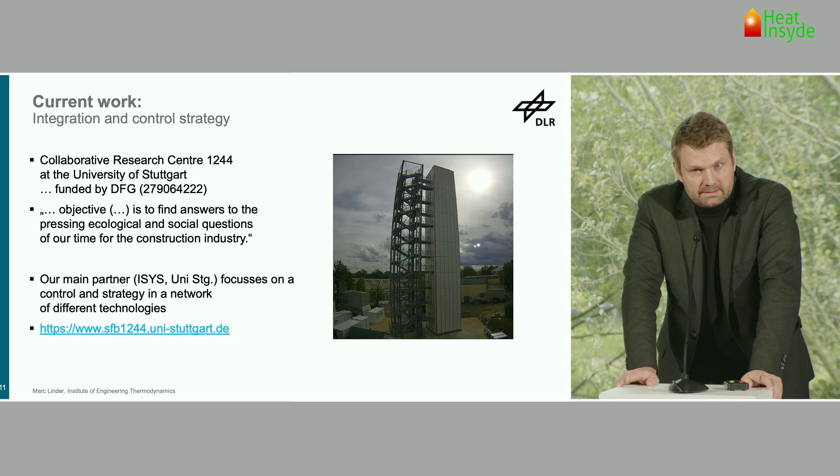Just an outlook: we have the system running now since half a year. We try to build it a bit smaller, put it into a container, and mid of next year, hopefully we transport the container to this high-rise building and test it there. Not to heat up the whole high-rise, that's clear, but hopefully to heat up one floor.

And with that outlook, I would like to thank all of you for your attention. Again, thank the consortium that they have me as external, but still it feels like an internal partner of this impressive work here. And of course, my colleagues that actually do the job. Thanks a lot.

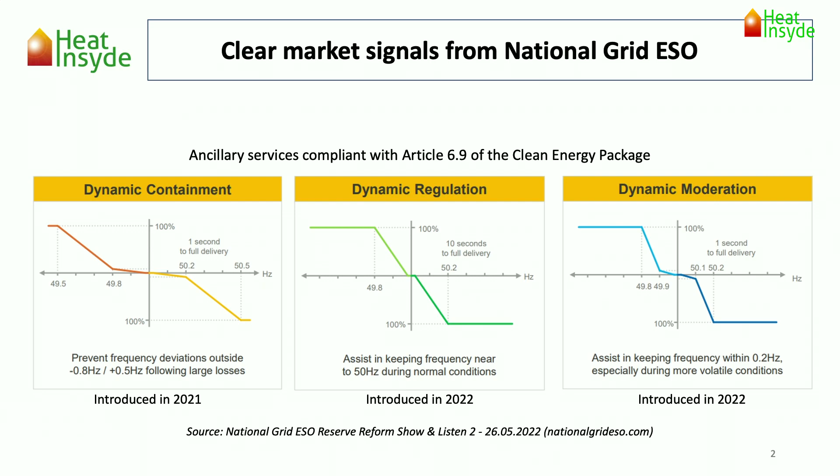These three services are procured through daily auctions, which means they're in line with Article 6.9 of the Clean Energy Package, and that sends a clear signal to the energy storage market, and that's what investors need. Olaf mentioned earlier there is a technology, but we need to bring it to market. The market needs to be created, and National Grid in the UK is doing a fantastic job. I don't work for National Grid, but I do believe they're doing a fantastic job bringing out new services which send a clear signal to investors.

It would be great to see other energy system operators around Europe do the same job. I know some of them are trialing some of these services, but it would be good to see them doing more at a faster rate, especially given the current political developments.

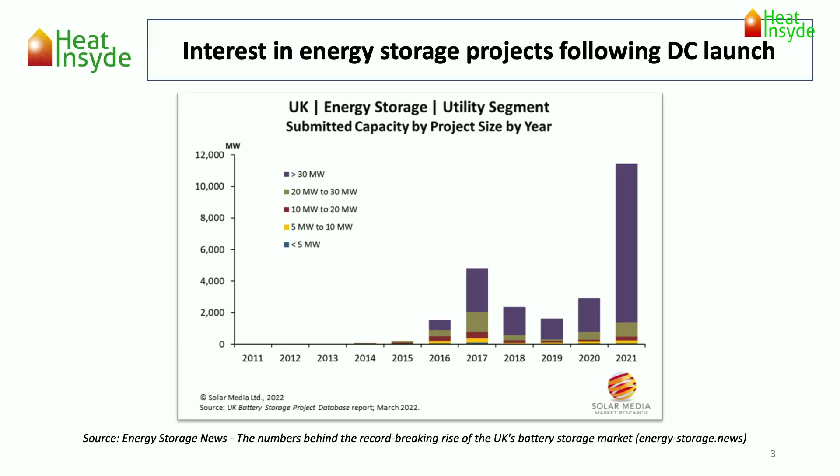Evidence of the market signal in the UK comes from the number of projects submitted for planning application. This graph comes from the Energy Storage News website with data from Solar Media, a company that gathers data from local authorities. In 2021 alone, there were almost 12 gigawatts of storage projects submitted in the UK. Most of them, if not all, are lithium-ion batteries, because there is demand for that. There are applications, there are revenues, and therefore the market followed by submitting applications, also in preparation for the other two services National Grid was working on.

Going back to the impact that the current political development is having on energy storage, at least in the UK - the high gas prices, high electricity prices, and high volatility in the energy market is increasing the market potential and revenues for energy storage projects.

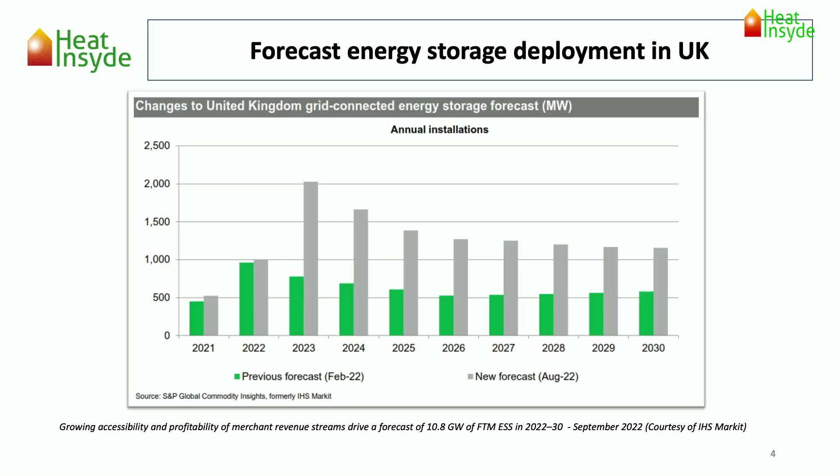To paraphrase a movie I watched a while ago: you build it and they will come. If governments and energy system operators bring out new services, whether it's flexibility or dynamic pricing for domestic electricity, technologies like the ones we're working on could be utilized - not necessarily for families to make money, but to save in this current climate.

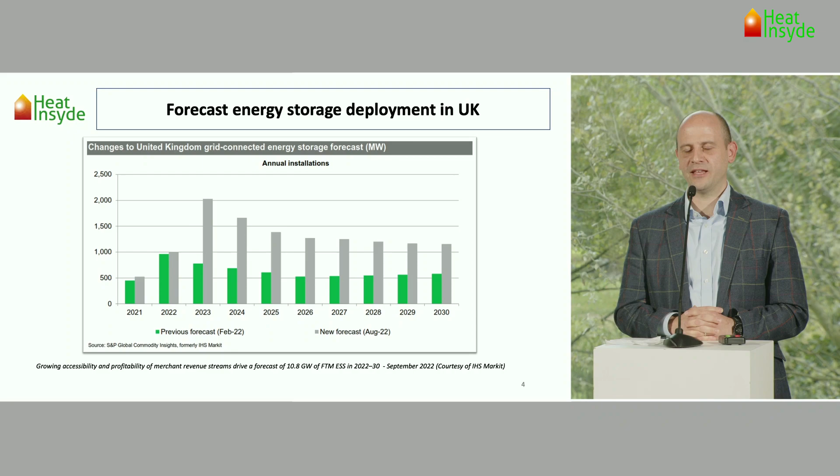One last thing - obviously higher revenues is great if costs remain the same, but that's not always the case. A slide I've taken from the International Monetary Fund shows the materials needed to sustain deployment of not just energy storage, but also renewable energy sources. There is scarcity in some of these materials, and scarcity means higher costs and higher prices. The fact that some of these materials are in the hands of just a few countries doesn't help either.

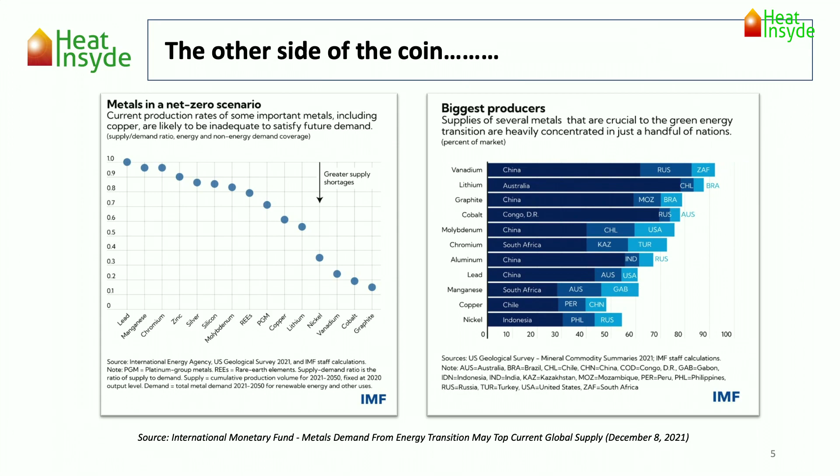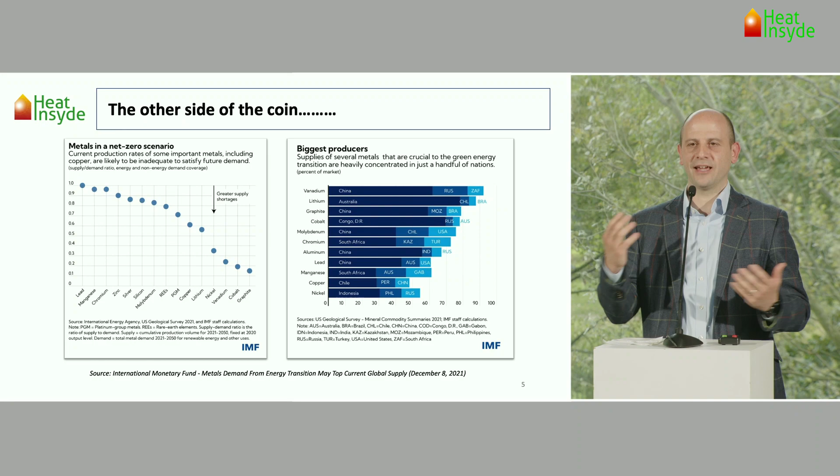So the impact that current political developments have had on the UK energy storage market has been positive because of higher revenues, but costs are also going up. The main thing is to create the market and let the technology slowly come forward. Thank you.